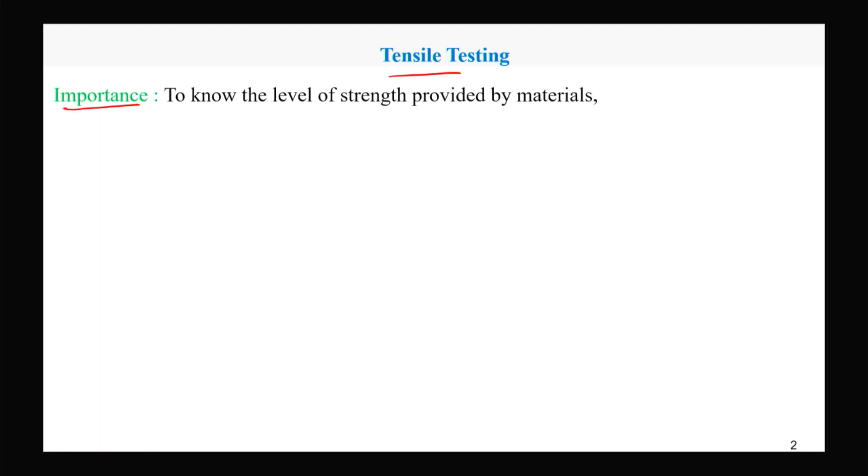So first, the tensile testing. If it is asked what is the quality of a material, so if someone asks the simple term, what is the quality of the material for a fiber, yarn, if we test, the first thing which comes into our mind is the strength.

So to know the level of strength provided by the material, it's basically that the strength which comes out for anything, it's called resistance. Suppose someone is pushing me, and I will try to resist, and depending on my strength, I will be able to resist. If the force applied on me is more than my inherent capability, that is inherent strength, then I will not be able to resist.

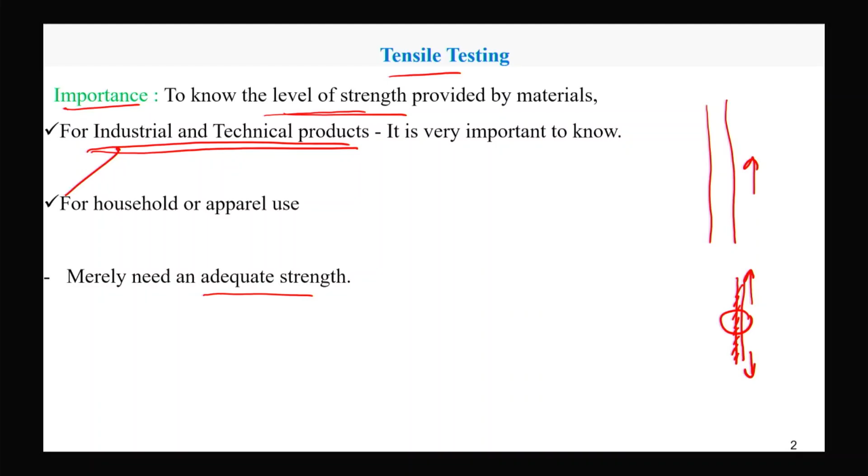For household and apparel, we merely need an adequate strength to withstand the force applied during daily activity. For clothing, apparel clothing, we need yarn strength just to withstand the handling during production and use.

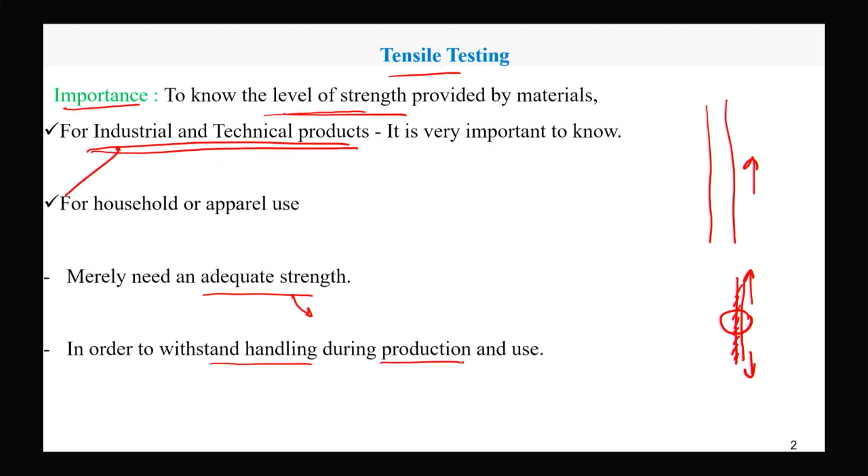So let us see what are the factors which affect the strength of textile. Starting with the fiber, the molecular structure of the polymer controls the strength of the material, or we can say it's the load elongation behavior of the material. If the fiber molecular orientation is parallel to the axis of the fiber, then we will get higher modulus. Similarly, with the molecular orientation which is not oriented, in that case we will get lower strength or lower modulus.

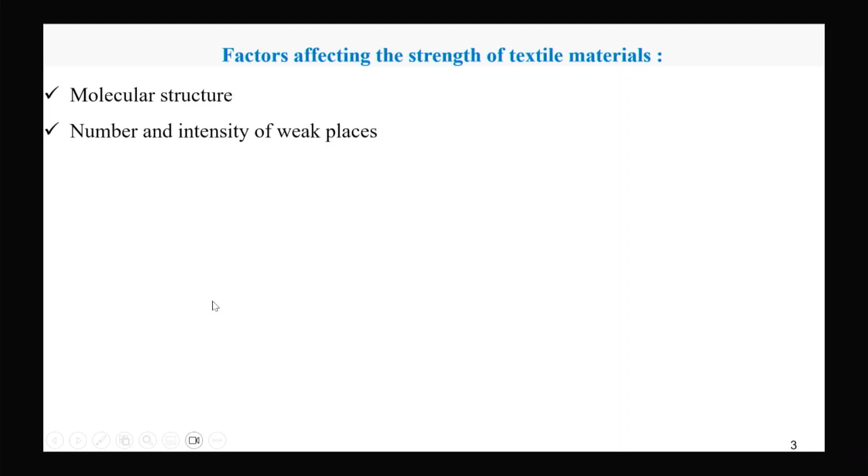Number and intensity of the weak places. So strength of a material is nothing but the strength of its weakest point. Suppose we have two yarns of same mean strength x bar, and yarn 1 is having the strength variability. This is in y axis, its strength. So along the length, the strength is like this.

And in another case, another yarn with the variability in strength is high. So we can see in yarn 2, the number of weak points are more. Although both the yarns have the same mean strength, due to the higher number of weak points in yarn 2, the effective strength of this yarn will be low. So because the yarn breaks at its weakest point.

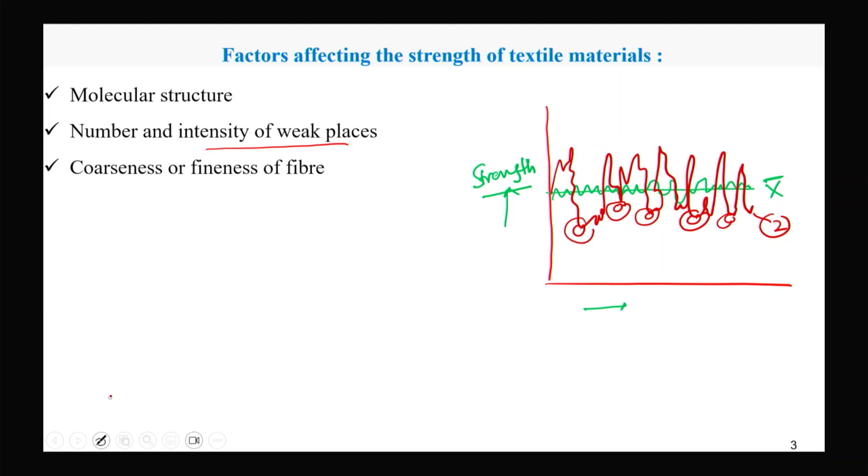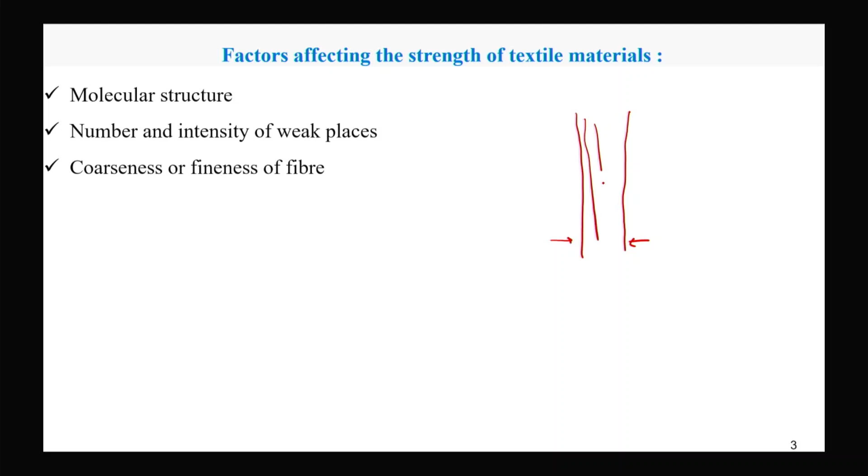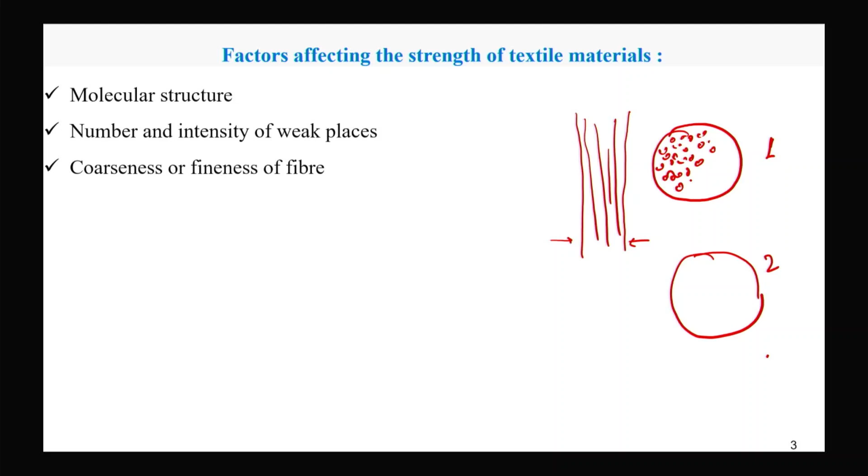As far as the staple yarn is concerned, we have discussed while discussing fiber fineness, for same yarn linear density, if we use finer fiber, like this is yarn 1 and yarn cross section of yarn 2, both yarns are of same linear density, but yarn 1 is made of finer fiber and yarn 2 is made of coarser fiber. As finer fiber has got higher specific surface area, fiber to fiber contact area will be more, there will be higher cohesion and it will result in higher strength with equivalent cross sectional area.

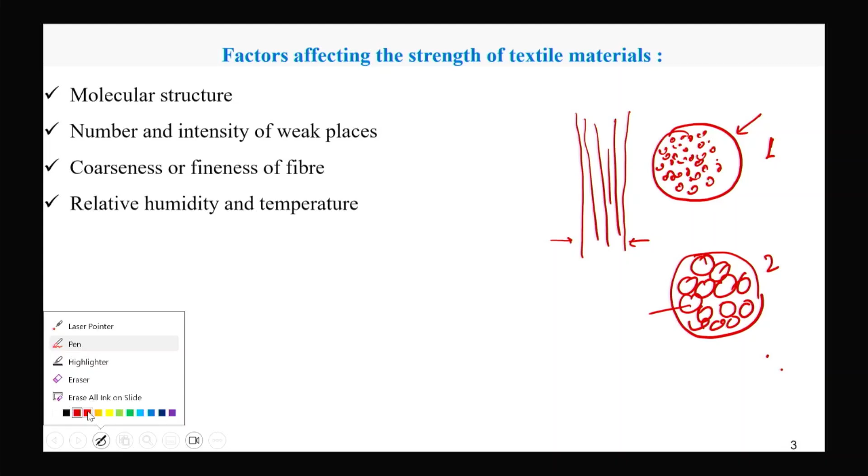Now, relative humidity and temperature. Relative humidity also plays a major role. Most of the fibers, after absorbing moisture, reduce their strength. So strength drops with the increase in moisture content, except for cotton. And temperature also plays a role. If the temperature is very high, above the softening point, then the strength will drop drastically. And also, if the temperature is very low, sub-zero temperature, sometimes the polymer brittleness increases, so tensile characteristics will be different.

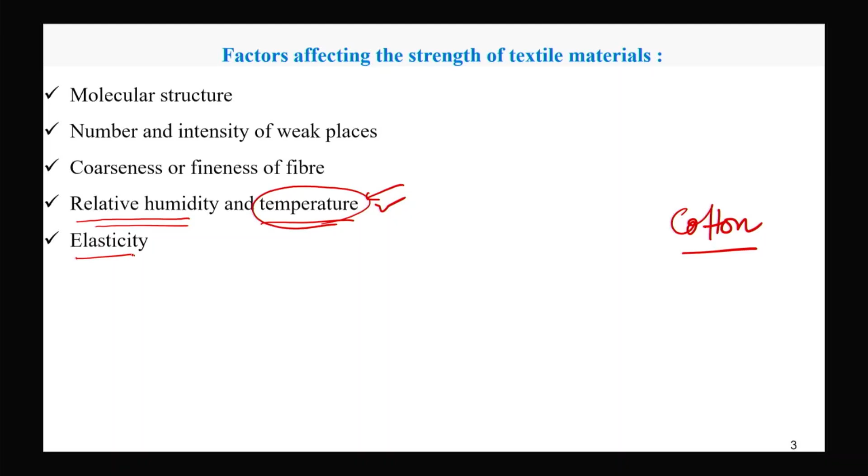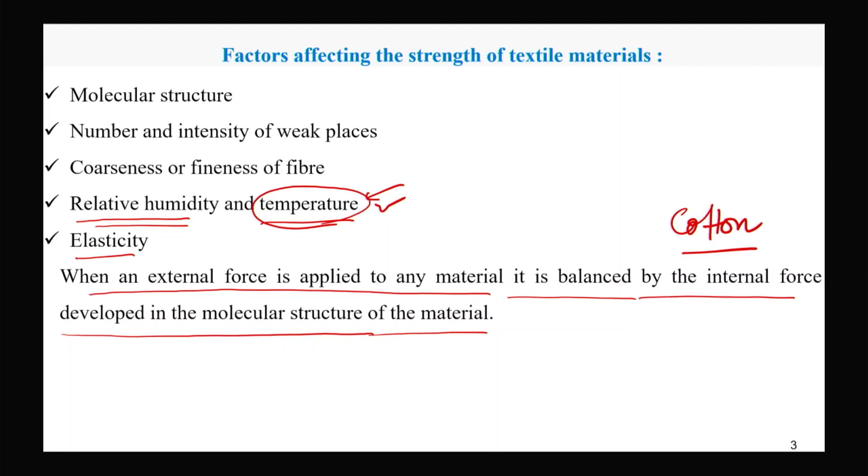Elasticity is another factor. So the strength is that when an external force is applied to any material, it is balanced by the internal resistance developed in the molecular structure of the material. The internal force developed in the molecular structure will try to resist the external force.

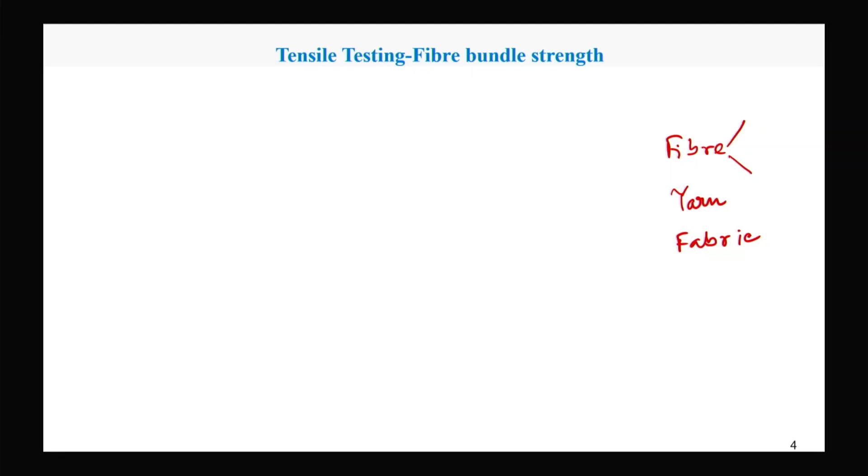Now, tensile force is measured for textile material in the fiber, yarn, and also in fabric. In fiber, we measure the tensile strength in two forms. One is in bundle form, where a number of fibers are taken together, particularly for cotton, where variability is very high. For natural fibers, most of them like cotton and wool, if the variability is high, it's better to test the bundle strength to get the average value. But the man-made fibers are usually tested in individual form, as there is very less variation in length and fineness of fiber.

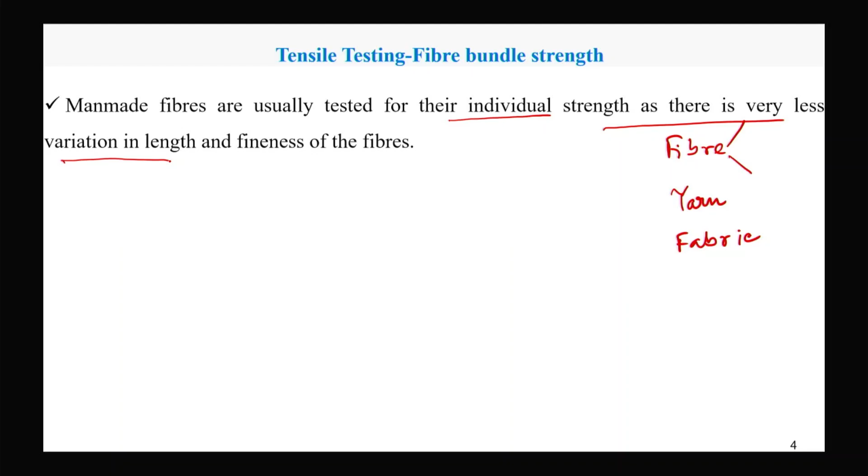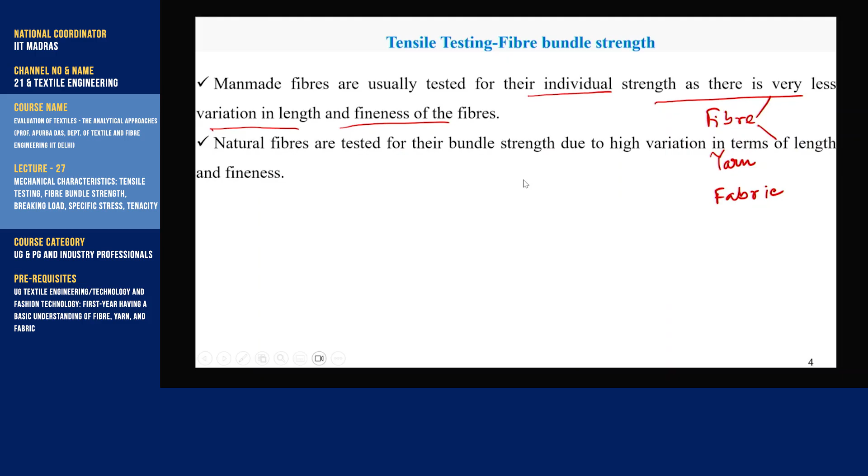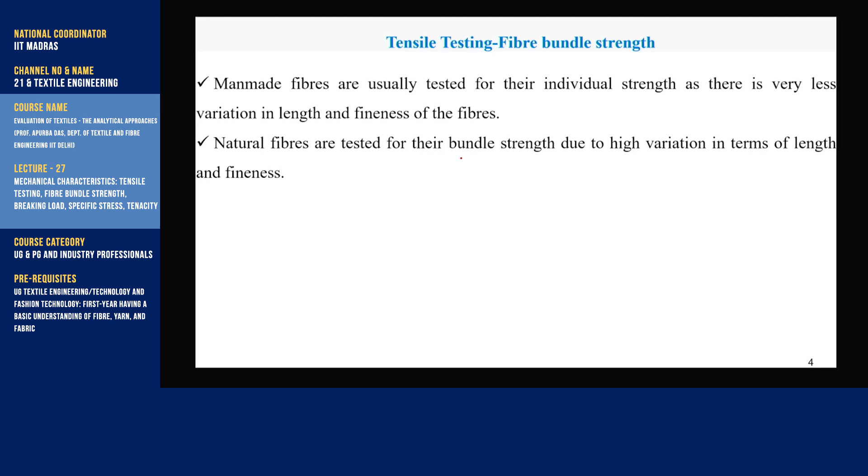So cotton is tested in bundle form and man-made fiber is tested in single fiber form, due to high variation in terms of length and fineness.

So what is done here? A bunch of fiber is taken. First the bundle is prepared, a bunch of fiber is taken, and this is called a bundle. So this is a fiber bundle. You prepare the fiber bundle, then the bundle is gripped by two jaws.

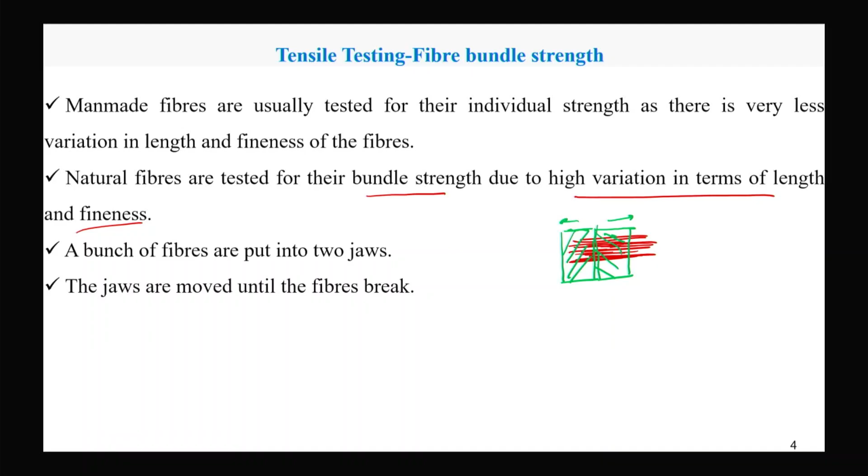This is jaw 1, left jaw, and another jaw, and they are pulled apart to measure the strength of the bundle. So the jaws are moved until the fiber breaks, and we measure the strength.

So breaking load and elongation at break are noted. Tensile strength or tenacity of fiber bundle in gram per tex is expressed in terms of the breaking load in kg.

So when we measure the load, the breaking load in kg, it's measured. Length of the specimen, that means when we are testing, we are preparing the bundle. First we prepare the bundle. The system is that we prepare the bundle, then it is placed in the jaw, inside the jaw, and whatever fibers are projected, these projected fibers are cut and separated.

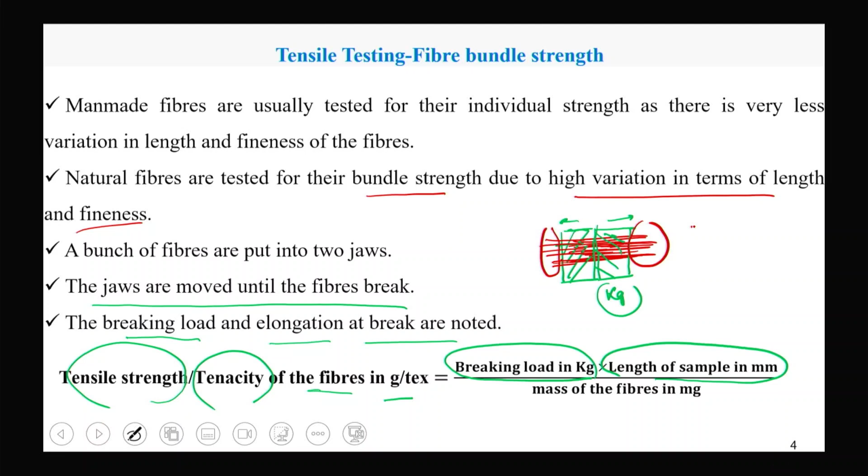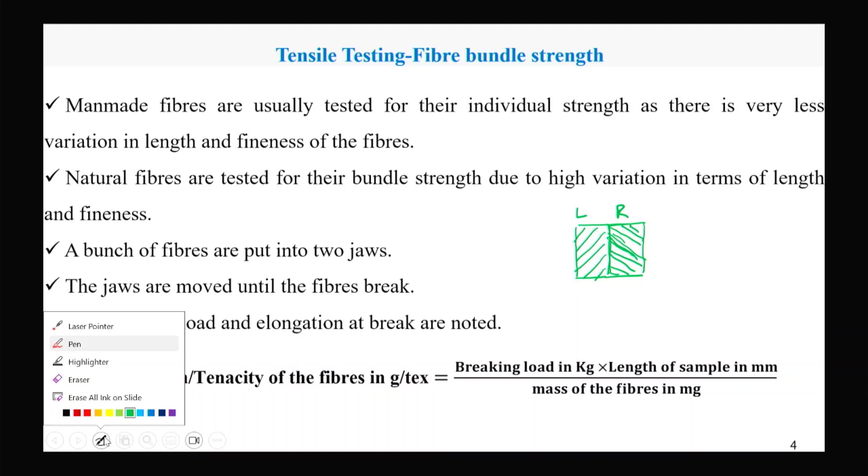Okay, and finally the jaws will be like this, this is the left jaw, and here the next jaw is started with, when they are in touch with each other. So the left jaw, this is the left jaw and right jaw. Two jaws are there, and fibers are, after cutting, the fiber bundles are within this.

So length of the sample is the summation of the width of the left jaw and right jaw, and typically in bundle strength testing for cotton, it has been observed it's typically around 11.8 millimeter. That we will discuss, because bundle strength testing is done either by stelometer or by Pressley tester. So in both cases, the bundle's length is typically around 11.8 millimeter, which is fixed.

But here one can see as the jaws are touching each other. This is the bundle, and this is right jaw and left jaw. They are touching each other. That's why this condition is known as zero gauge length. What is the gauge length? Gauge length is the distance between two jaws during tensile testing. So for zero gauge length test, the length of the fiber is 11.8 millimeter.

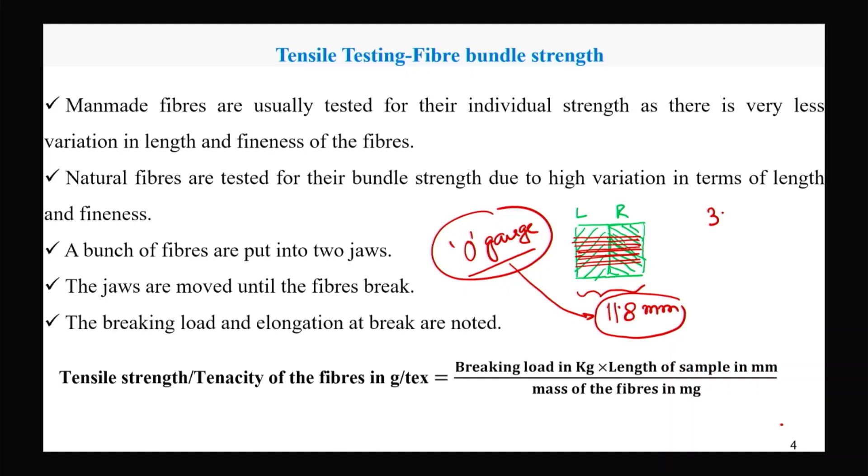And another way to test is 3 millimeter gauge. In that case, there will be a gap between left and right jaw, and the total length of the fiber bundle, length of the sample in millimeter, will be 11.8 plus 3, so 14.8 millimeter length, and this is fixed for the instrument.

So breaking load is recorded, and then after testing, because the fiber edges are cut after gripping, the broken fiber specimens are taken out, from the left jaw and right jaw. So from left jaw, the broken fibers, and after taking out, from right jaw, this will be the total mass of fibers which were gripped, which took part during the testing. So from this relationship, we can calculate the tenacity or tensile strength of the fiber bundle.

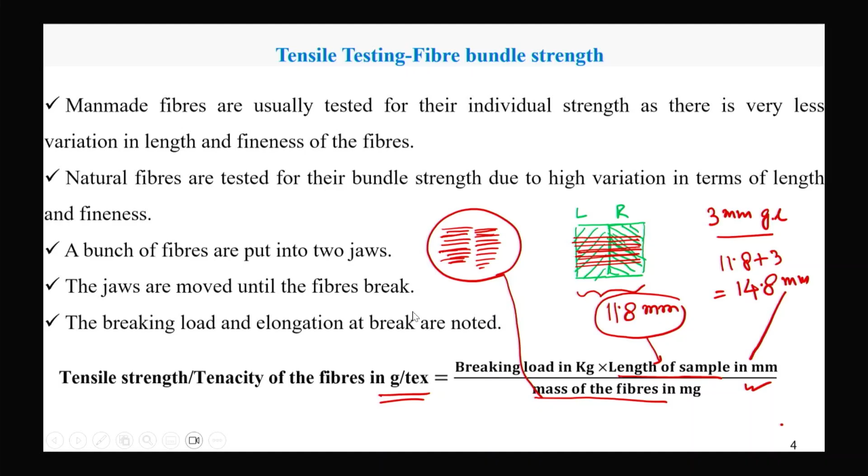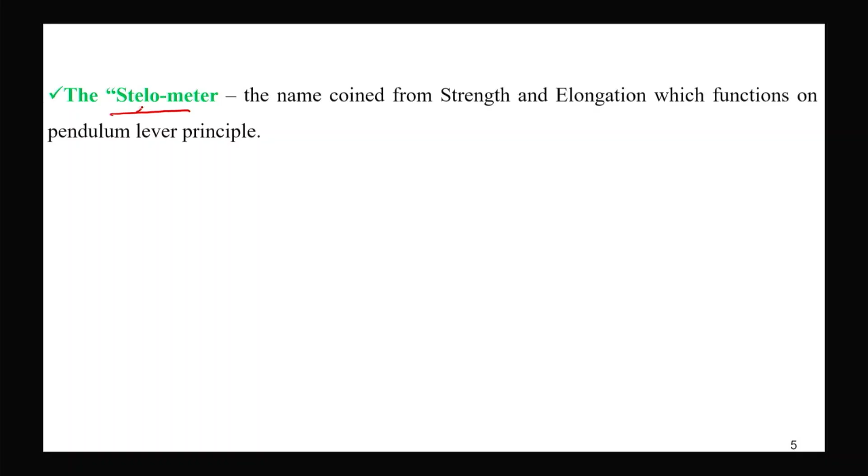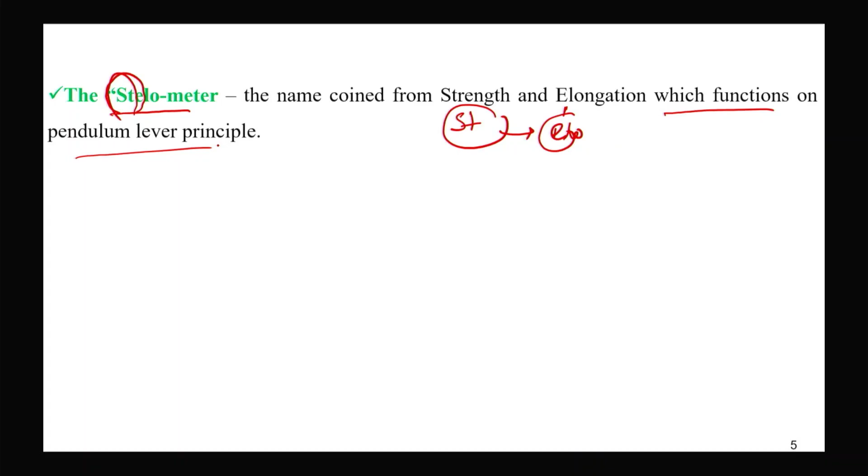So the stelometer is the method. The stelometer term came from strength, ST, and elongation, ELO. So you join together, stelometer, and this works on pendulum lever principle, that we will discuss separately.

Another method is Pressley fiber strength tester, which works on pivoted beam balance principle. And also in high volume instrument tester, HVI, we also measure the bundle strength.

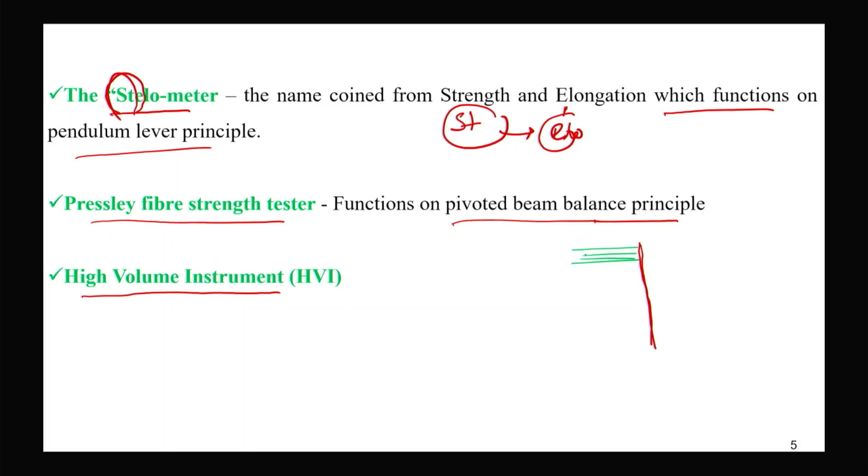So in discussing the length measurement, what we have discussed, the fibrosampler, this is a fibrosampler, is prepared to measure the fiber length. By light scanning, we get the fibrogram after testing the length. The same sample is used to test the strength, and that is also in the form of bundle strength.

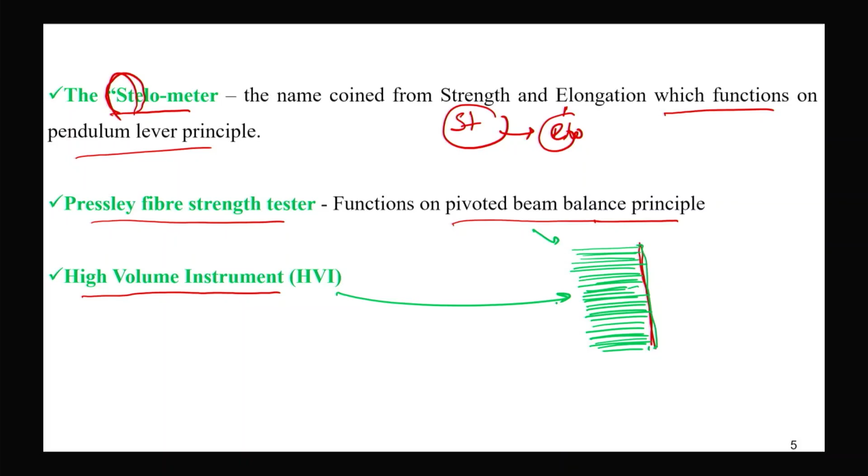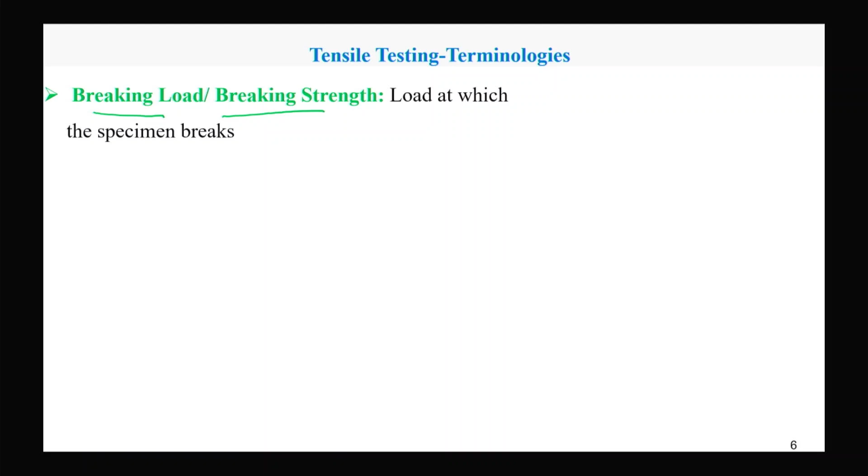Now we will discuss the terminologies. There are different tensile test related terminologies. We must understand, and we must also understand the difference between these terms and their interrelationship. Breaking load or breaking strength: what is breaking load? The load required to break the material.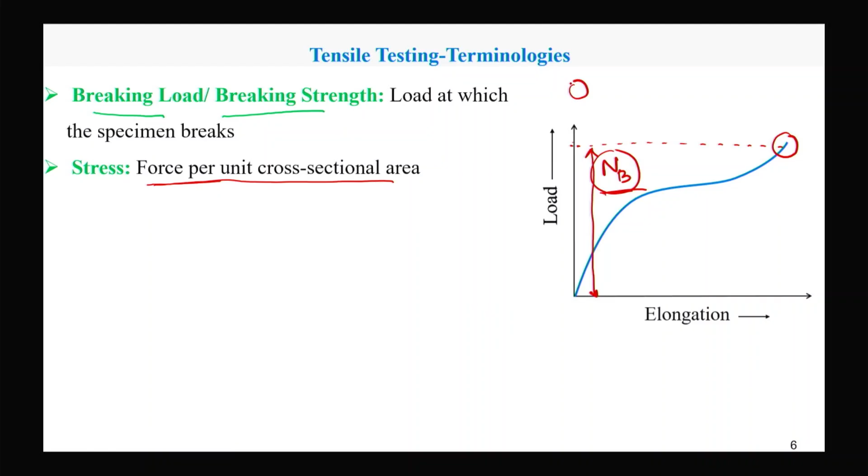Stress is expressed for any uniform engineering material where we can measure the cross section correctly. The stress is force per unit cross sectional area. So suppose this is the load, P, the stress load required to break this material is N_B, and the cross sectional area of this material is A. So stress will be N_B by A, that is breaking stress. But for textile material, it's difficult to measure the cross sectional area.

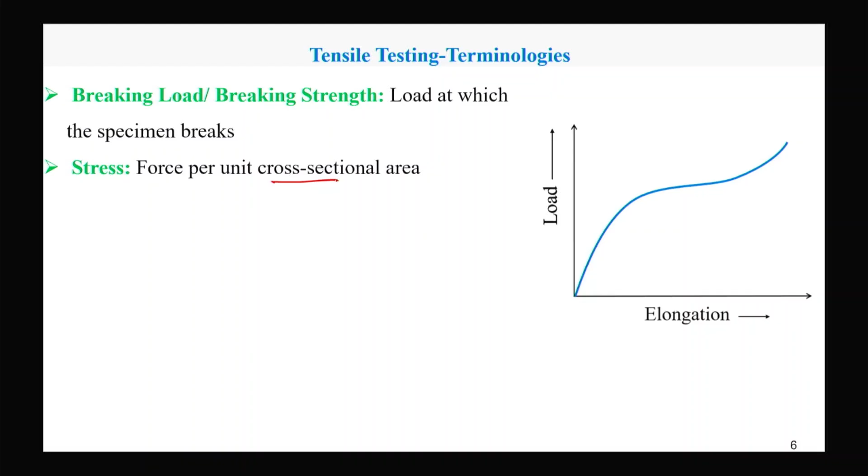That we have already discussed. The reasons are the fibers are not circular in cross section, and during yarn manufacturing we impart twist which makes the cross section non-circular. So what we do, as the fiber, yarn, even fabric are irregular in nature, exact cross sectional area of fiber, yarn and fabric is very difficult to measure. So we have to see the alternate way to express the stress. Here we express the stress in terms of specific stress, that is load per unit linear density.

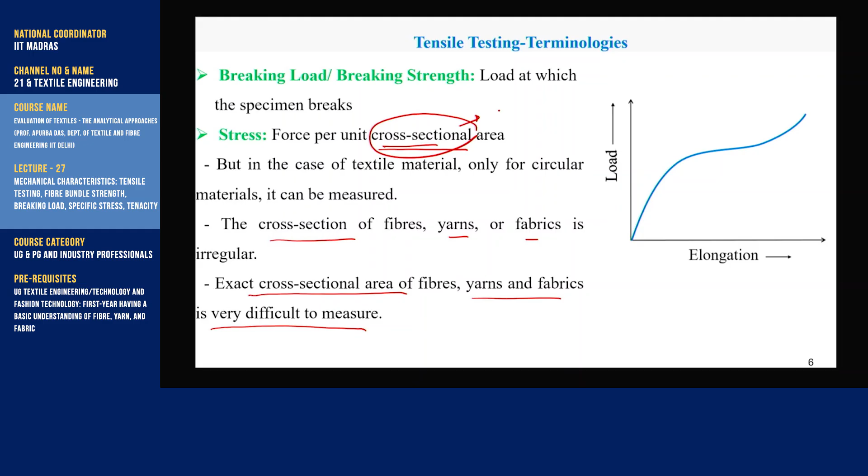So in case of textile material, we don't get the cross sectional area. So instead we measure the linear density, mass per unit length, and for yarn we express it in terms of tex.

So suppose one yarn is breaking at a load of, say, 200 centinewton, and the linear density of the yarn is 10 tex. So the breaking stress is calculated as 200 divided by 10, equal to 20 centinewton per tex.

So to differentiate from normal stress, where load per cross sectional area is used, here we express this in centinewton per tex, based on the mass per unit length, that is linear density. We can call this stress also mass stress.

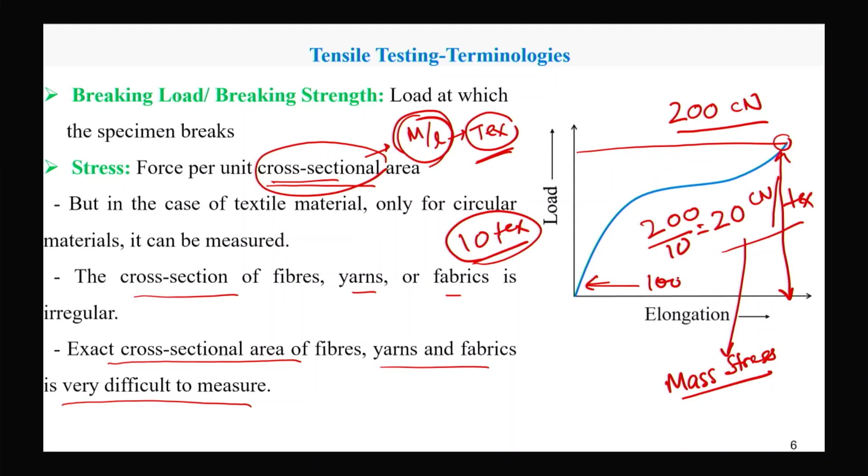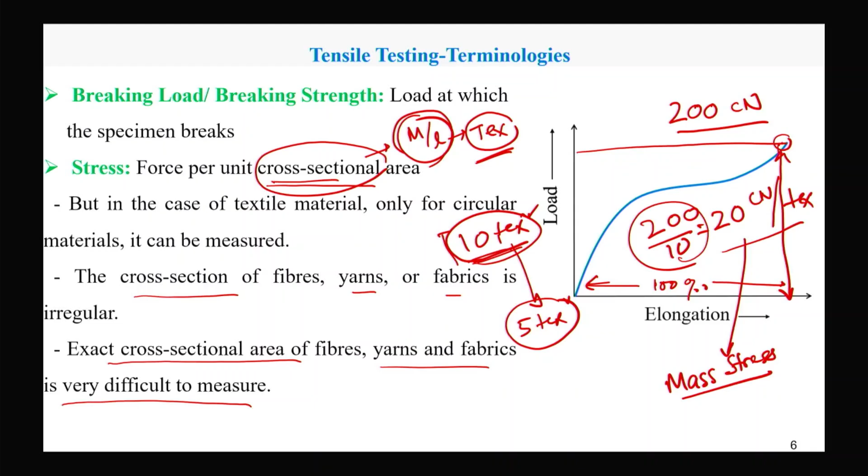This linear density of the yarn or any material is the linear density at the initial stage before any elongation. As we elongate, the tex value will change, it will decrease, because it's mass per unit length, and for the same mass we are changing the length. Suppose it is a 100% elongation, for example. Then after elongation the tex value will become half, say 5 tex. Typically 100% is too high, but for our example let us assume this. So when the material is breaking, at the breaking point the linear density is actually 5 tex, not 10 tex, but still we use the 10 tex for calculating the stress. So one should always remember the load per unit linear density uses the starting linear density, not after elongation.

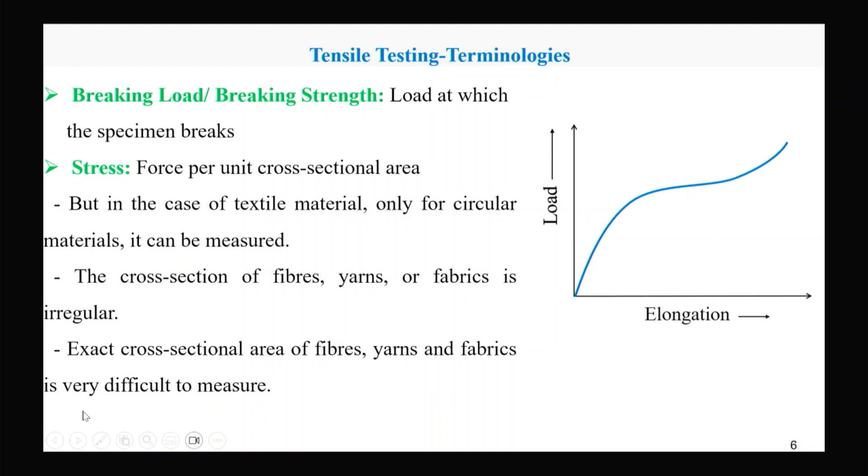Now this is a typical load elongation curve that we have already discussed. This is the breaking point, and from the breaking point we can calculate the breaking load and breaking elongation. The elongation at which the material breaks is called breaking elongation. Initially there will be a straight line for some time, after which there is a deflection from this straight line towards the elongation axis, and this point is known as the yield point.

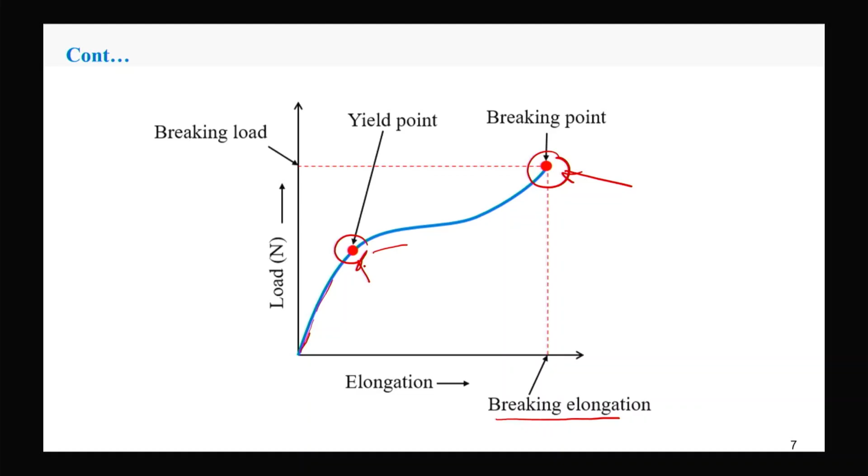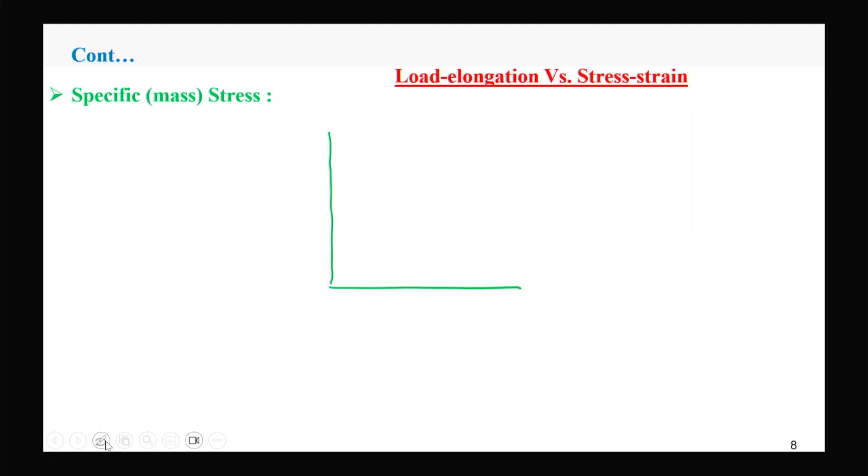Apart from the load elongation curve, there is another curve called stress strain. So stress strain curve means we derive the stress strain behavior from the load elongation behavior. Now let us try to draw the load elongation curve. This is the load elongation curve, with centinewton on the y-axis and elongation in millimeter on the x-axis.

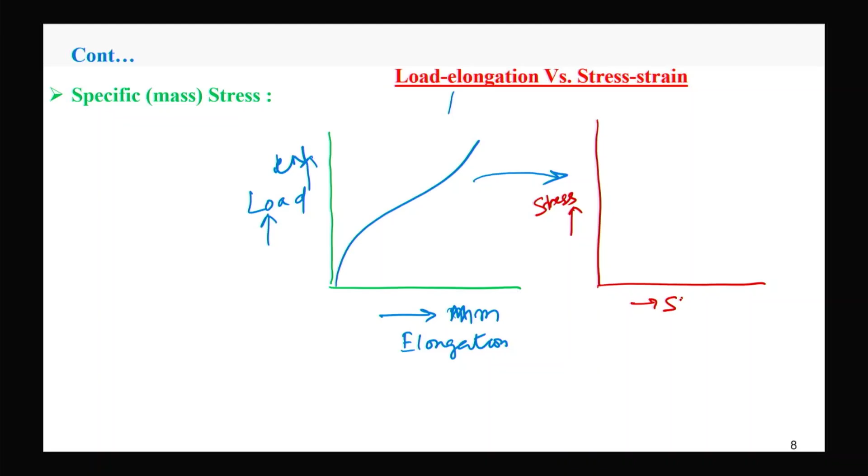From the load elongation curve we can convert it to the stress strain curve, with stress on the y-axis and strain on the x-axis. To convert the load elongation curve to stress strain curve, we need a few parameters, because any tensile testing measures load and elongation, and we can convert it to stress strain by knowing the initial linear density, say T initial, and another parameter, the gauge length, which is the length between the two jaws before testing starts. These two parameters are required to convert load elongation to stress strain.

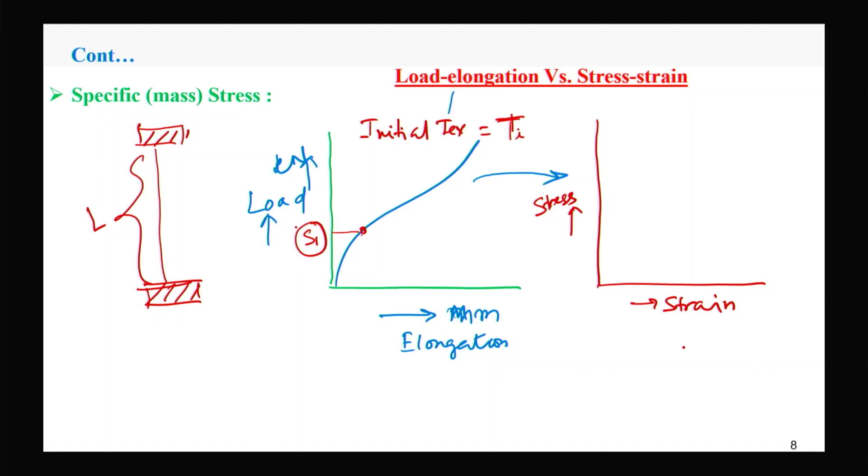Now let us see stress. Suppose at this point we want to measure the stress. We know the load, say strength load S1, and when we divide this by the initial linear density, it becomes stress equal to S1 by T initial. So that is what we plot. Similarly for another point, S2, it will become ST2, which is S2 by T initial.

So in this way we plot, but at the same time we have to plot strain also. So we know the elongation E1, which is the elongation at the point where we get load S1. So at this point the strain will be E1 by L, the initial gauge length. Similarly E2 by L is the strain at the other point. So strain is the ratio of elongation in millimeter by the initial gauge length L.

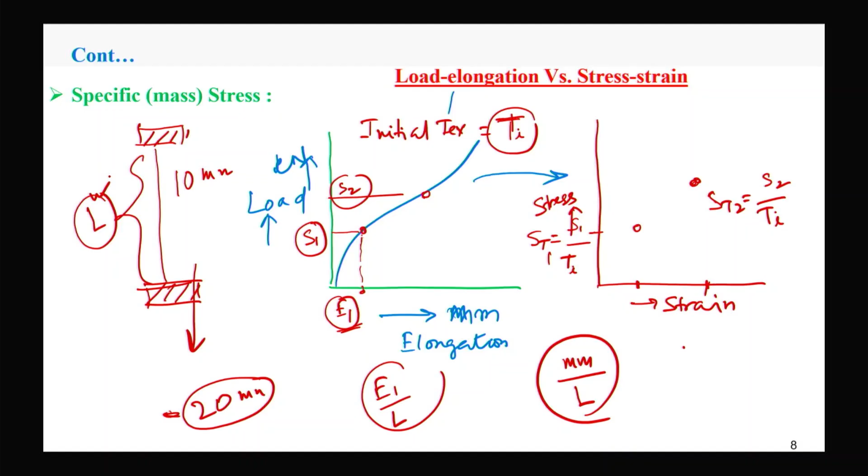Similarly, when we apply stress, the material gets elongated. So from the earlier example, initially say 10 millimeter was there, it has become 20 millimeter. But we calculate based on the initial gauge length. So this is the point. In this way we convert the load elongation curve to the stress strain curve.

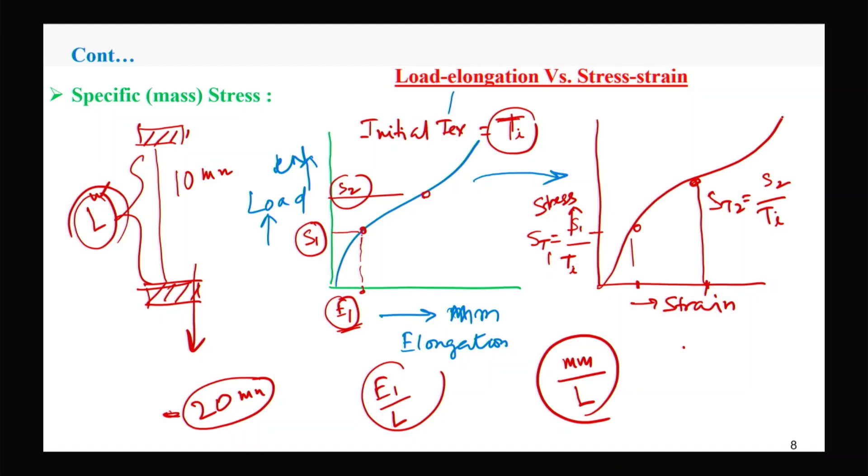Let us see the animation here.

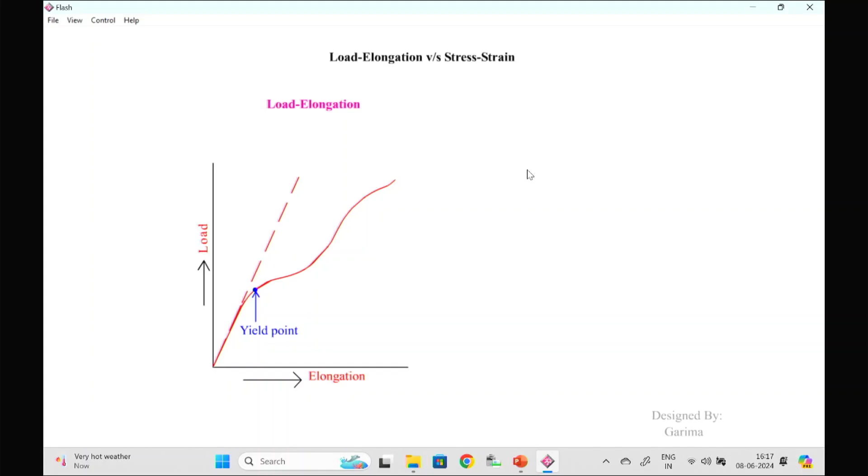So first let us draw the load elongation curve. And the point where the curve bends, it's a yield point. So breaking point is identified at the point where it is breaking. From there we can calculate the breaking load and breaking elongation.

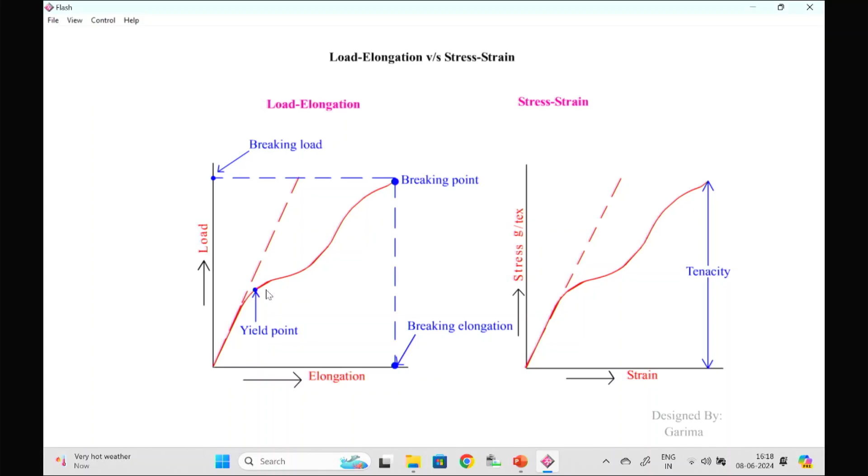Now stress strain, if you see, we can plot as we have discussed earlier. So load is divided by the linear density. Here in tex, load is given in gram force. So breaking point, at the breaking point, the stress at the breaking point is known as the tenacity, breaking stress or the tenacity of the material.

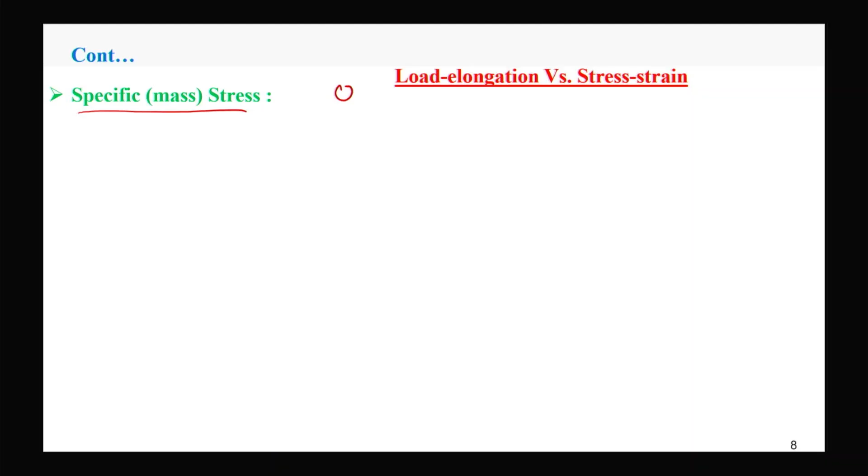So in place of stress, where the cross section is not very uniform, here we use the specific stress or mass stress that we have discussed. So this is the breaking point. In stress strain curve we call it as tenacity, stress or specific stress, because it's a load per unit linear density. So whether, that's why actually the mass component is there, so we call it as mass stress.

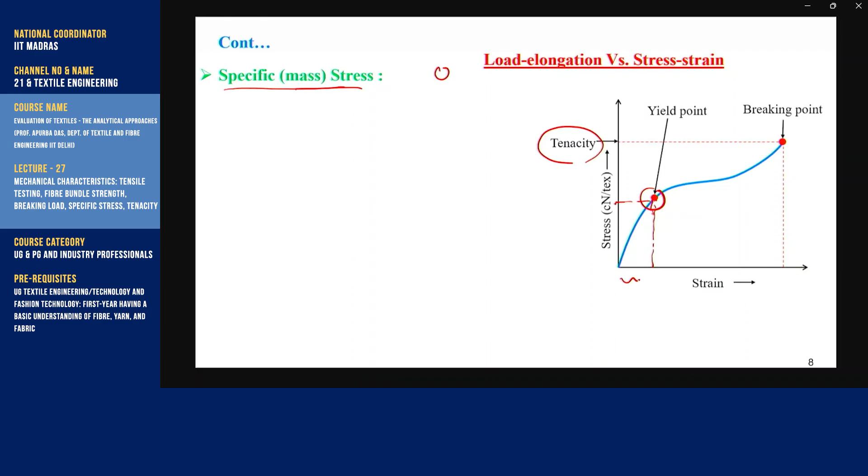And this is the stress strain behavior of any yarn or any fibrous material or any material. So, this is the yield point. Where there is a sudden change in the inclination, it is beyond the Hooke's region. So, from this yield point we can identify the yield stress and yield strain.

So, let us draw another stress strain curve where we can see here. So, we will discuss here two types of structure. In the x axis is strain and y axis is stress. So, this is one breaking pattern, where the breaking pattern is such that the breakage does not take place at the peak value. Unlike the earlier one. So, this is the point where the peak point is, and the point here is the breakage point. The breakage point is lower than the peak value. So, where fiber to fiber slippage takes place in textile material.

So, this type of phenomena happens. And after reaching the peak value where the fiber to fiber slippage takes place, still there is no disintegration. So, slippage takes place. So, it ultimately disintegrates at the point which is lower than the peak point.

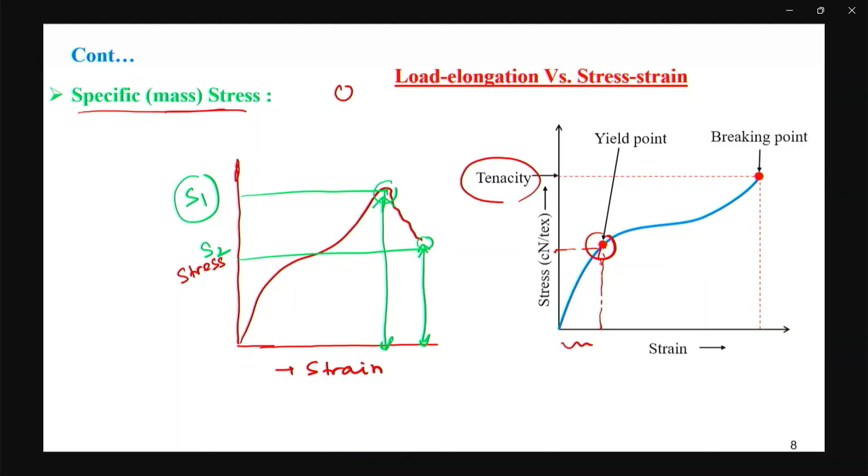So, what will be the tenacity here? So, we have got two different types of stress. One is the peak value, and at the point S2 the material breaks. So, here if you see from this diagram, the tenacity we can define from S1. So, here the tenacity is actually the stress at the highest point or peak point, not at the point where it breaks like S2. So, S2 is not the tenacity, here S1 is the tenacity where the maximum stress is possible in any material.

So, mass stress in case of textile material is where the linear density is used instead of cross section. And here you can see it also allows, for different linear density, we can compare the specific stress. If we want to compare the tenacity of two different types of yarn, say one yarn is coarser yarn 10 Ne, another finer yarn which is 50 Ne, so if we get the stress strain behavior, we can simply compare the tenacity of the materials.

Now, let us consider two materials. One is say 10 tex yarn, which is having the breaking load of 100 centinewton. Another yarn which is coarser, where the breaking load is say 140 centinewton. So, apparently it looks that the 20 tex yarn is 140 centinewton. So, can we tell that 20 tex yarn is stronger than 10 tex yarn?

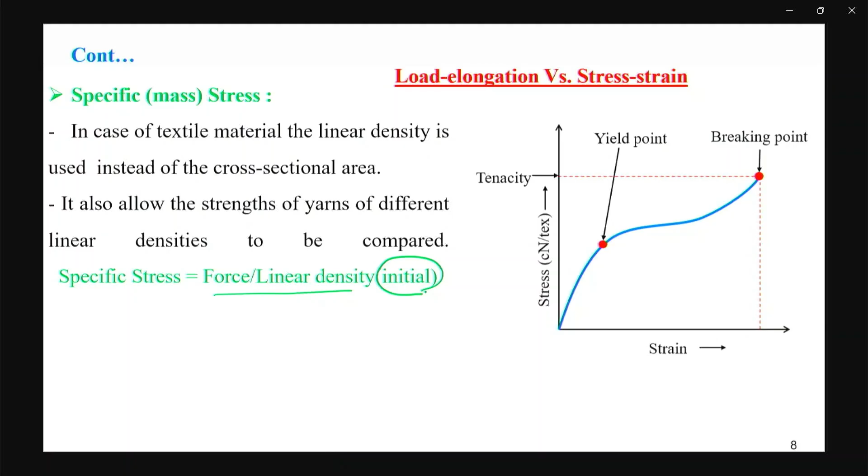So, to compare, we have to use the linear density. Therefore, the tenacity is the force per linear density of the material at initial stage. So, tenacity we can define as the specific stress at break, or specific stress corresponding to maximum force, because whichever is higher. So, specific stress at break is not always true, but we can always consider that it corresponds to the maximum force available, as observed in the stress strain curve.